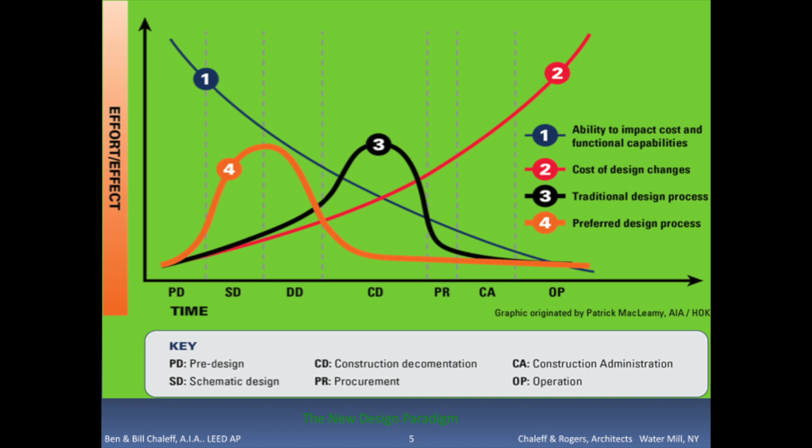So here we see, for example, just in site analysis, we're looking at all the different drivers, the different forces that impact a decision about what to do on a particular site. This is just a quick sample. Down here we can see we're looking at the sun and its path through the sky at different seasons and different times of day—very important for us to understand when we're doing a building.

Here we're looking at what exists in our area—what are the resources, what are the features, the size of the site, the contours, the topography, that impacts drainage. That's what's being shown here, from rain, which could cause erosion, which we looked at in the previous lecture, and views.

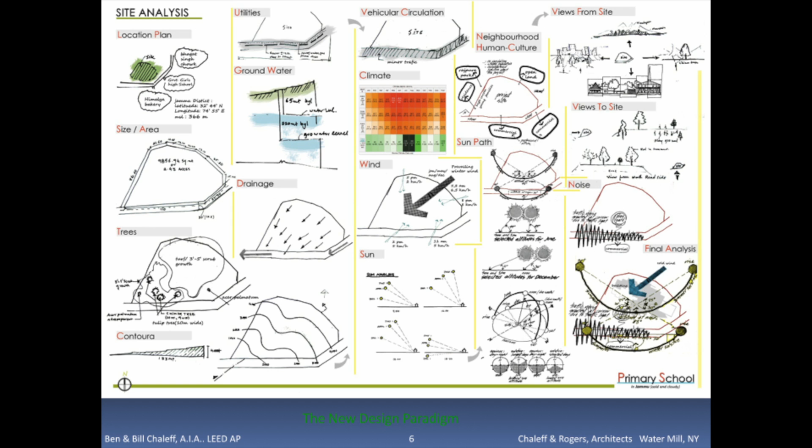Then there are cultural decisions to be made about the project. So you want to bring everybody in on the front end and look at all these different aspects and get them laid out on the table, because somebody whom you think is just a plumber may have experience and bearing on the work of, say, the electrician or the duct person, or may even come up with a wonderful idea about the program that has nothing to do with the mechanical systems of the building—but he just happened to have been to China or something and saw something with bearing on the project, and he can convey it. We don't want to pigeonhole people.

So again, site analysis—do you want to say anything at this point, or continue along here? This is just a different way of diagramming some of the same things that were shown: wind and climate and sun orientation. There are some symbols you can see over there—prevailing winds, existing vegetation. Use your pointer.

It's just a different way of diagramming, but it's the way that we typically go about analyzing a site and integrating what the design possibilities might be from the beginning, taking into account everything—both the natural features and the built environment around it.

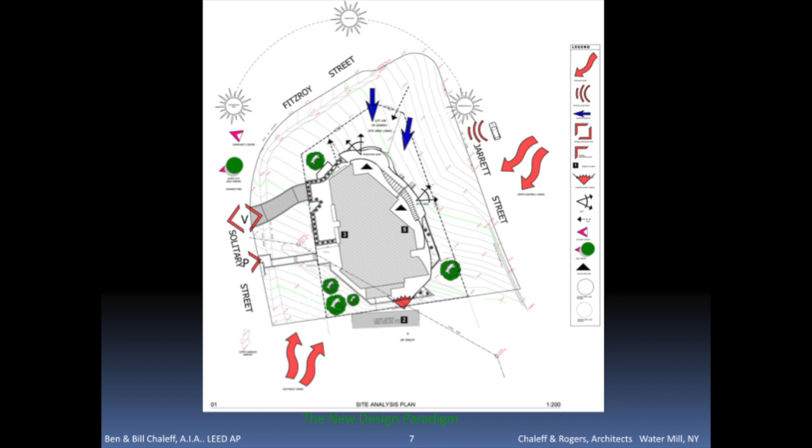This is something I'm always saying in the office: user patterns trump engineering. We get very excited about designing and calculating things now—modeling and calculating—and we have tools and equipment, some of it very expensive and magical in what it can do, going out three decimal places and so forth.

But with the best modeling and the best calculations, and your best imaginative projections about how the building may be used, that all gets blown to hell when the users come into the building and do something entirely different than you anticipated. And then the building is seen as not working—the building is failing.

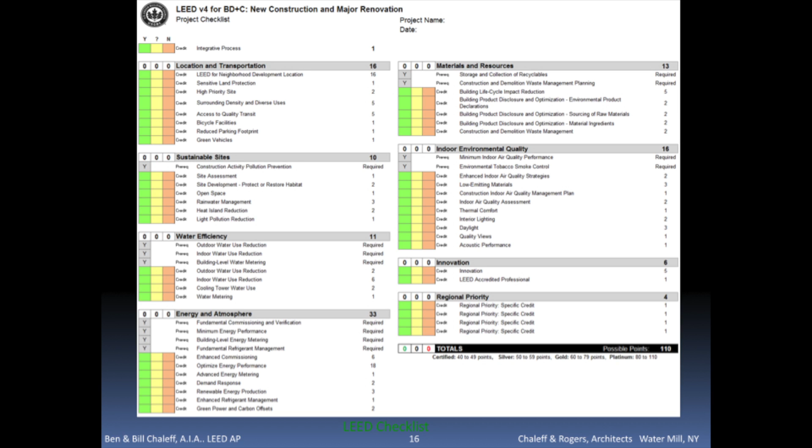And the main difference between the two is certification for each step. With LEED, they do an independent third-party certification of every little point. So you have to get somebody else in, and sometimes this costs money too and takes time. Some other expert comes in and sees that you've done this the way they expect to see it done, and therefore they issue a letter with their signature saying that this point complies with the rating system. And that happens through the whole checklist if you're LEED.

You can self-certify to a large degree with the National Home Builders list. But I don't think the tax incentives and other incentives that you might get from LEED are as substantial, and that's why it requires third-party verification.

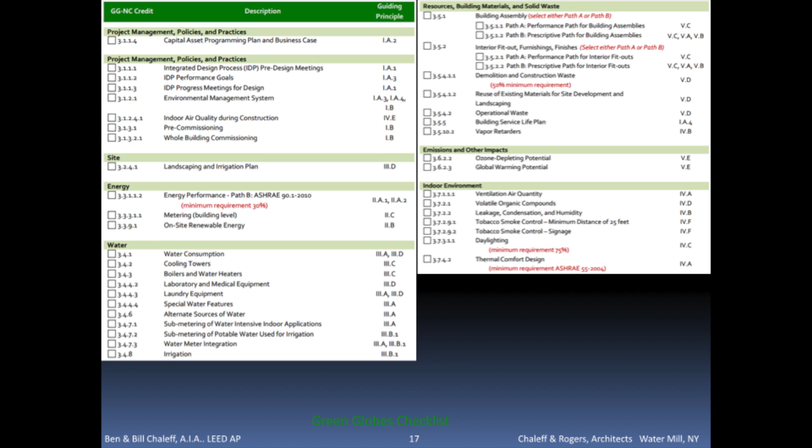Not necessarily. Particularly from government, because they don't want to be accused of a monopoly. These are considered professional engineering compliant standards, whether they're certified or not, and you're eligible for whatever programs the governments have that involve money under any one of these banners.

So they are taking the U value of all the windows and the walls and calculating what the building should perform as a number, as a metric. And then they're also integrating this whole checklist at the same time, which talks about - actually, I guess this happens during the walkthrough.

This is not so much - and before, when you file the plans. But some of this actually has to be observed, not just that it's on the plans, but that it was actually built that way.

So they're checking that all the sealing was done, for example, where the frame wall meets the foundation wall, that's all caulked, and that all the air infiltration is minimized. They're looking that the ductwork is all sealed properly internally, as well as if it's in an unconditioned space, which is not a good thing.

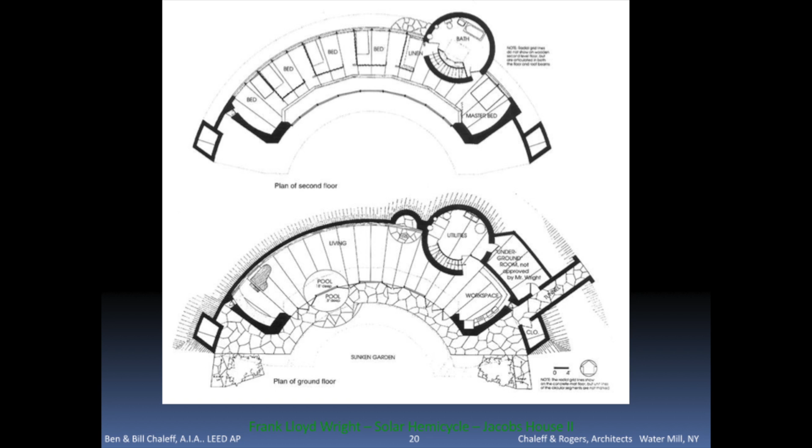A really amazing building, and a lot of work was done by Frank Lloyd Wright at this time, and by the Keck brothers, also in the upper Midwest. The overhangs are designed to shield the summer sun, which is at a high angle, and allow the winter sun to come fully in. Even this balcony on the second floor is cut back to allow for that and for air circulation. This second floor, incidentally, is suspended from the roof with steel rods every so often. It's a great building, and was done for very, very little money.

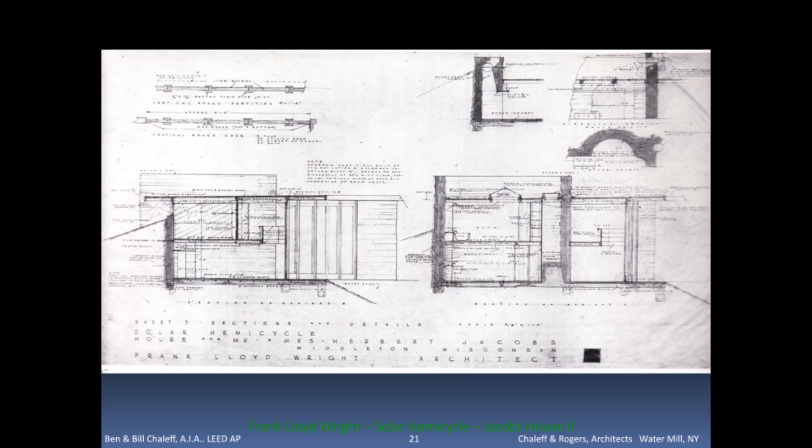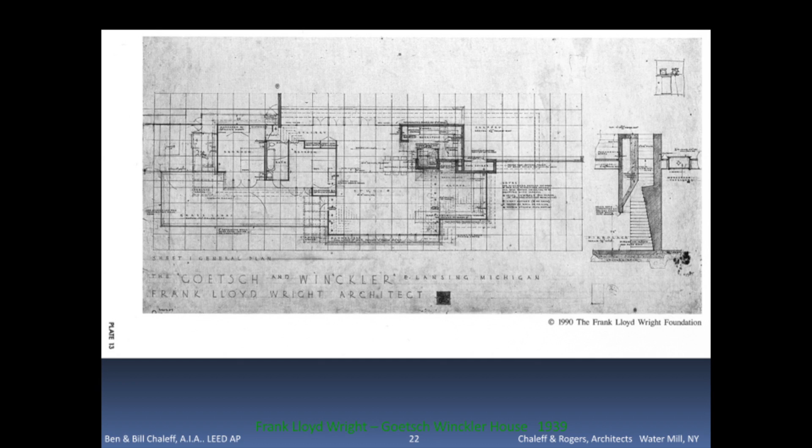Radiant floor. Frank Lloyd Wright brought us the hydronic radiant floor. In traditional folklore, particularly in Korea, China, and Japan, there were air floors where flue gases from fires were led under the floor, and the Romans used that as well to heat their buildings. But Wright put that in piping, and there was a big renaissance of radiant floors—certainly right after World War II, Levittown used radiant floors here on Long Island. Just another Usonian house.

Frank Lloyd Wright, with this line of building, the Jacobs House was the first one, but developed a series of buildings that used very much the same detailing and technology and materials, just concrete and wood frame. He organized the plans in such a way that these were the first true middle-class buildings, not like the Victorian buildings that we know and love and we see.

There's some right on Main Street right here in Bridgehampton. They were designed to be operated by staff - there was a butler's pantry, maids' quarters in the attic and so forth. Here, this is operated by the user. So the kitchen is open to the dining room, the whole space flows. This is the living room and the dining area, and then down a little corridor, in this case only two bedrooms.

He also invented the carport, and there's a dramatic photo showing that the overhang of the cantilever of the carport is just really fantastic.

Occasionally brick pylons - he would sometimes switch off stone for the brick. But these buildings were simple and inexpensive. The first Jacobs house was done for $5,000 back in 1936. The journalist's house - this is the interior of this Goetsch-Winckler house.

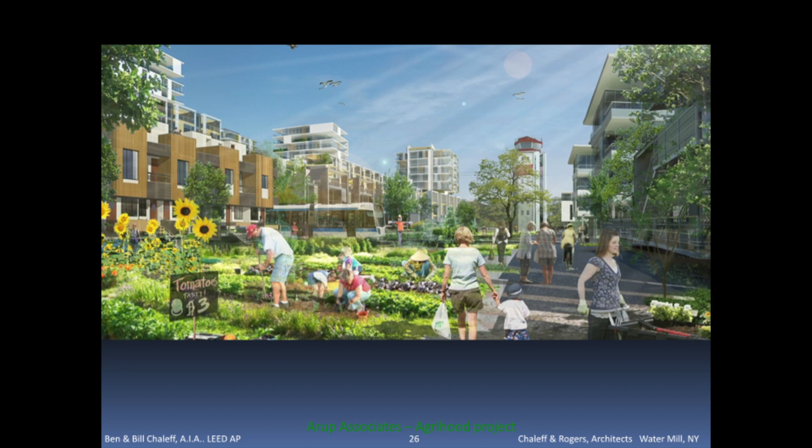But they were interested in the beginning too in environmental design, and actually had architects in-house and provided integrated design with full architectural and engineering services, including all the mechanicals and electronics and plumbing and so forth. And that's what they're really known for. They're headquartered in London, but they have offices in New York and in cities all around the world. They do amazing buildings, which you will see. You can jump in any time.

This is just, I think, a decorative greenhouse at the Bacardi Bombay distillery. And this is the Mushroom Tower.

Take a good look at it, and then the next slide has some text that's descriptive of what it's made out of and how it works, all right? So I won't read it to you, I assume you can read it.

So they're working very hard to close the loops here, and their carbon footprint is zero.

When was that built? I don't know, I'm sorry I don't know. What's the reason for it? Well, this was an experimental structure - this is the Mushroom Tower, but it's just showing the feasibility of the material. It's a test to build, so I don't know when this was built, but if it looks like it might have some years on it, I would guess it's at least 10 years old. And the question is, what condition are these bricks in today after 10 years standing outside?

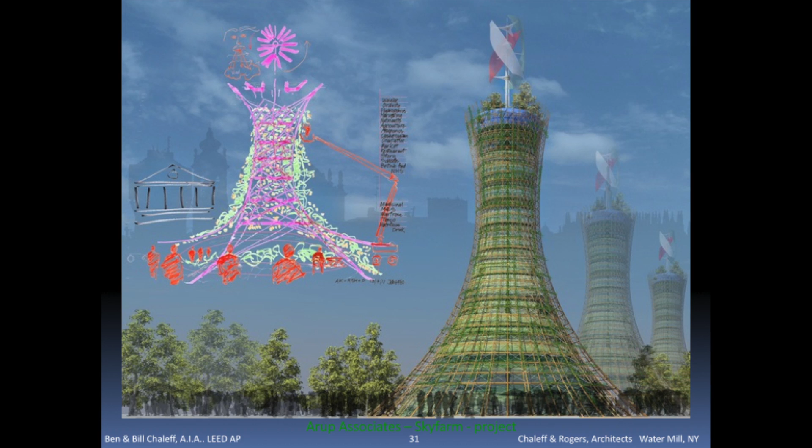That building is lit by sun energy still used for grow lights? Not for this, this is not a grow light building. I'm talking about buildings that are totally indoors, used with shelves and racks of trays of plant medium.

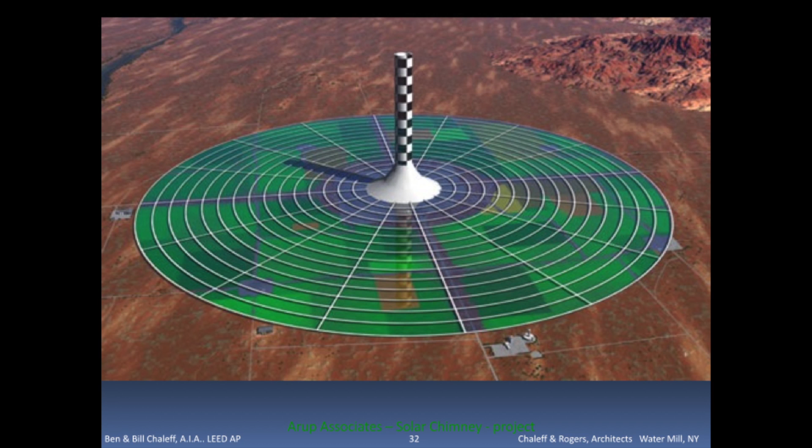It's used almost like a library, you walk down corridors and there are racks of plants. If you go to Page Restaurant in Sag Harbor, they have a vertical wall in back growing greens for your salad right there, plus a couple grow lights and trays in their basement growing other greens for your table. So this is happening right in our own neighborhood.

This is an extraordinary building, a solar chimney. It's a project, a design, unbuilt, just a project. I believe they did build a small sector of this in North Africa. It's designed to be built in desert country where not much else is happening. It's huge, I don't know the diameter, maybe half a mile or so.

This blue line represents a greenhouse roof. That big disc around the central chimney is a greenhouse roof. Warm air from the desert is drawn in from the perimeter because of the stack effect, heated by the sun. As it heats, it goes out and up, creating a fantastic draft. This is the mega super chimney, and that draft is used to drive turbines. So it's a way of producing electricity without reflectors and other things we usually see, a different form of wind energy, combined with solar here.

The interesting part of this design is explained here: you're taking in solar energy through the glass, and greenhouses work because they're relatively translucent to light energy but relatively opaque to heat energy. That is, translucent to short wave forms of energy and opaque to long wave forms of energy. That's why we have glass doors, windows, and greenhouses - that's the principle it works on.

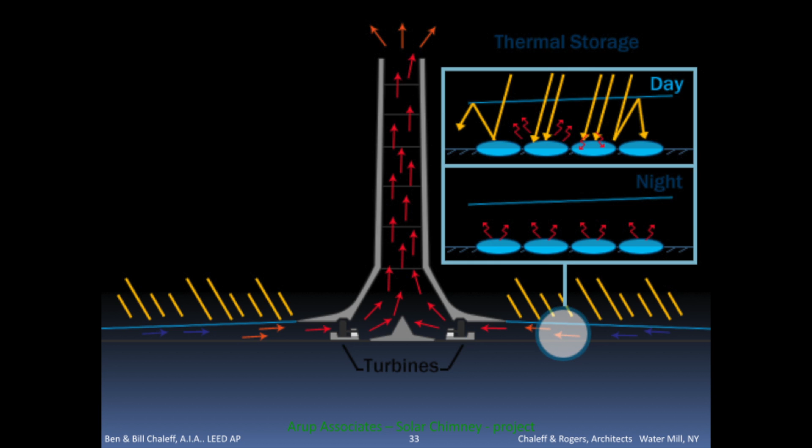There's a concern with restoring and regenerating nature, reintegrating the natural environment into the built environment. This is why Carol had us come speak with you here in the Natural History Museum - the new green buildings are literally green, we're sensitive. The design and engineering community responsible for them is very sensitive toward integrating the built landscape with the natural landscape.

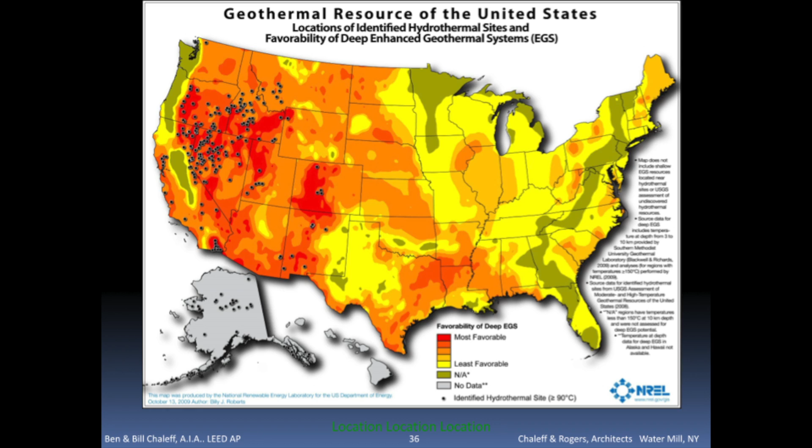And insolation. Long Island has the same amount of insolation as Nashville, Tennessee.

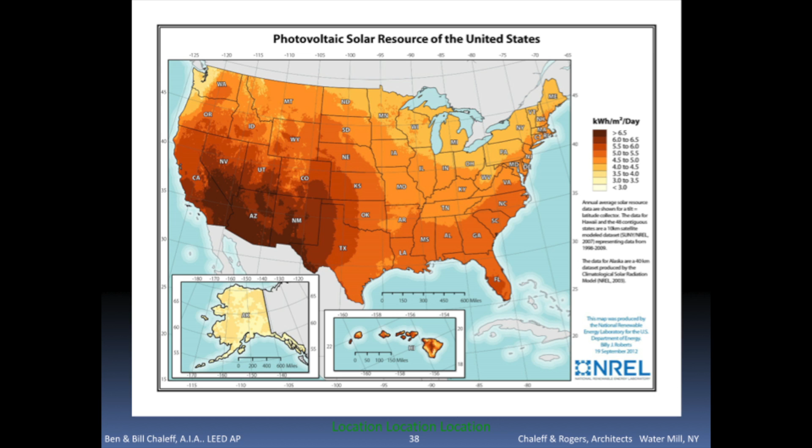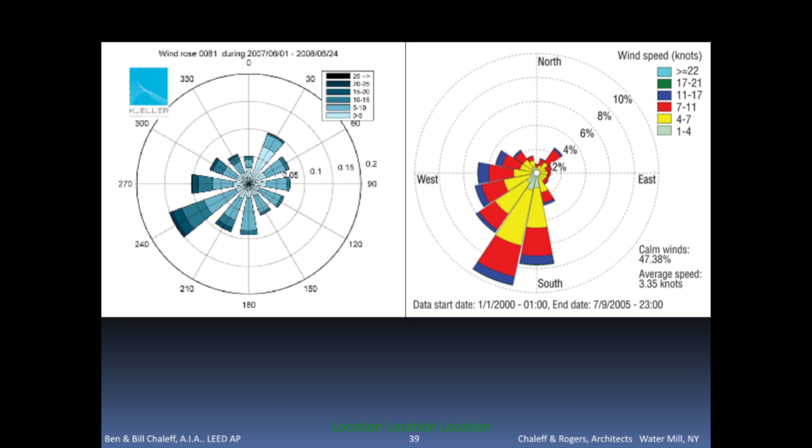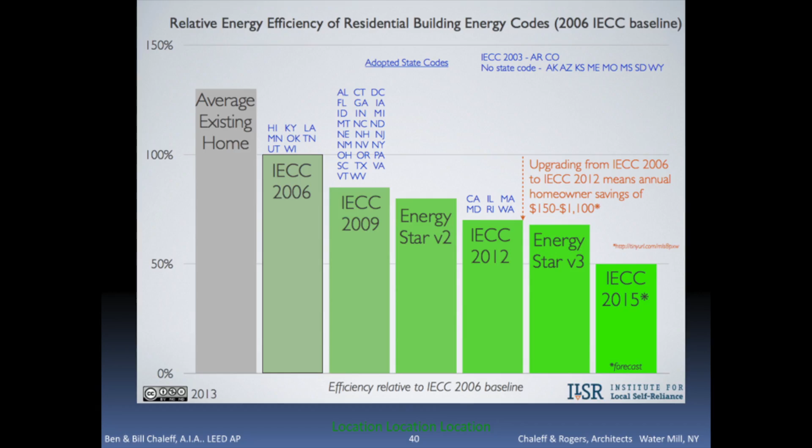No state and code don't mandate it. And there are parts of New York State where you don't need to comply with a code. The way it works is there is a code, in most cases a state code - the state writes it or adopts a code, and now we're getting together so that states adopt the international code. If your town does not adopt that code, then there is no building code where you live. But as far as I know, there's no place in New York State where you can build without getting a septic permit, and that's usually issued by a county government.

And this number is rapidly going down because of - anybody? Right, LEDs. We have a little story about that coming up in a minute.

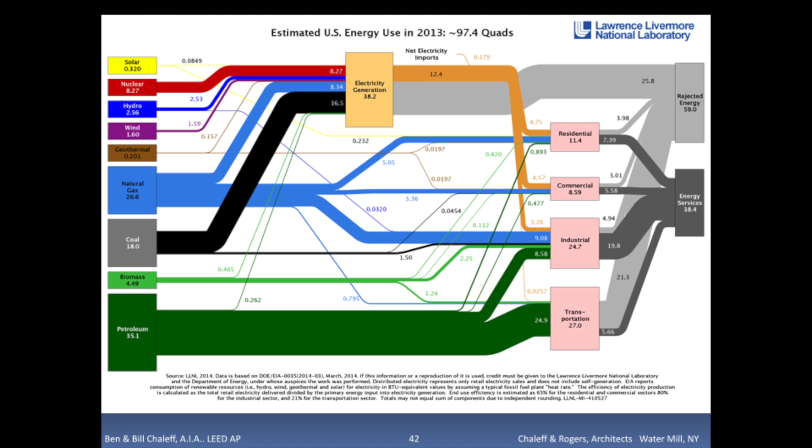And I'm going to put my friend Gordian on the spot and ask him to define a quad for us. Oh, okay, all right, wait, I think it's... we'll have to look it up. No, it's not - it's a lot of energy, a lot of zeros behind it. Just a lot of zeros behind it. Okay.

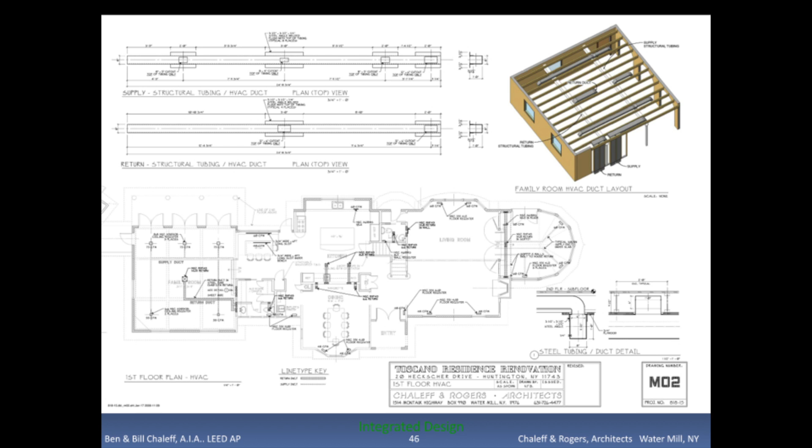So we put two beams at third points right here. And I don't know if you can see it clearly, but we echoed those with, pardon the word, fake beams here and here at third point. So we had a coffered ceiling of 9 panels, which would look very nice. This was on a slab, the garage.

So we had no way to get the ductwork up to that second floor bedroom. So we brought the ductwork up here in the wall between the garage and the building, and the ductwork became, these steel beams became, instead of wide flange beams, the I-beam that we all know, here's the beam. It's a steel tube. We sized the steel tube to be the right size for engineering the loads for the structure, and we sized it also to be the right size for the duct.

So one of these steel beams was the supply. It says supply structural tubing duct. That was here. And the other one was the return, and we had to put holes in them, and they connected. They picked up these little feeders and the registers. This shows the layout. And this was the duct system, and it was the structural system.

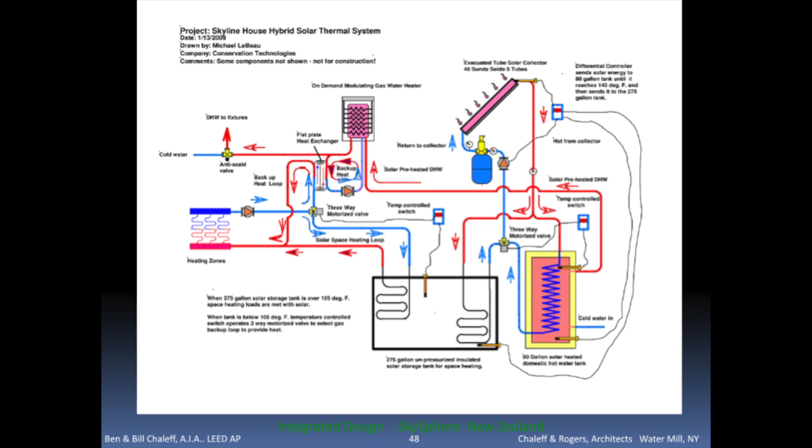And these fake beams, which were made out of cast foam, unless you got within 3 inches of them, they looked like old weathered barn beams, big old beams, but they're made out of foam, polyurethane foam. Instead of making them big solid chunks of foam, they hollowed them out. You're really buying a 3-sided piece of foam, a U-shaped foam.

We looked up the size of those, and it fit exactly around the steel beam. So that became the insulation for the duct as well. So on all those 3 levels, because we're doing this in-house, since we engineered and sized the ductwork, we engineered and sized the steel, we could do this integrated design.

Next. And then we picked up some eye candy for you. Let's see, just wind up with some of these. These are buildings around the world.

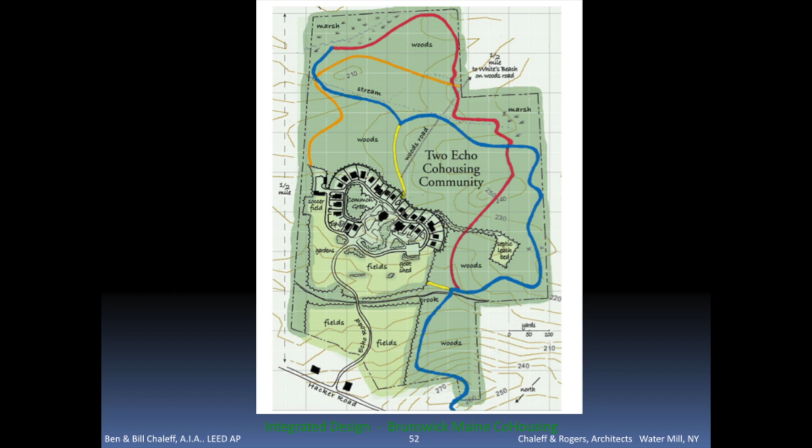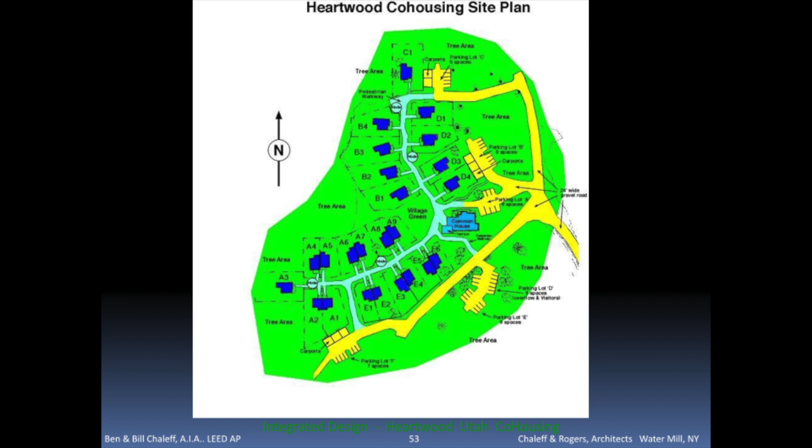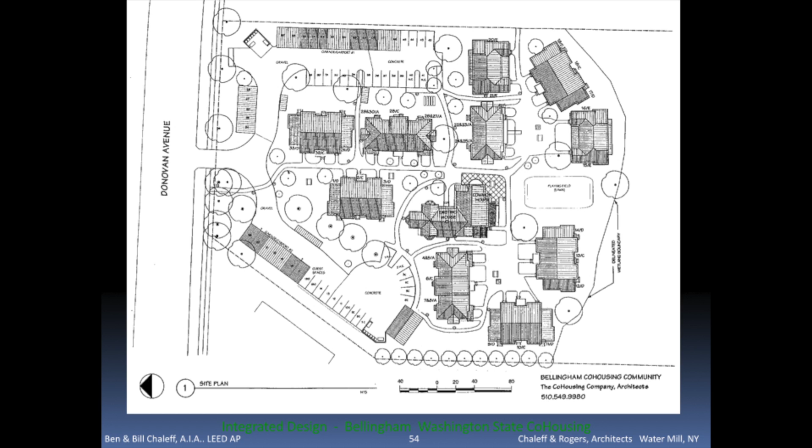This is much better. This is in Washington State, I imagine in a more urban setting, maybe on the outskirts of a village, where every square inch has to be accounted for. So it's very efficient. This was an existing house, and this lot may have belonged to that existing house, and then they added on a big common room, and this became a co-housing project.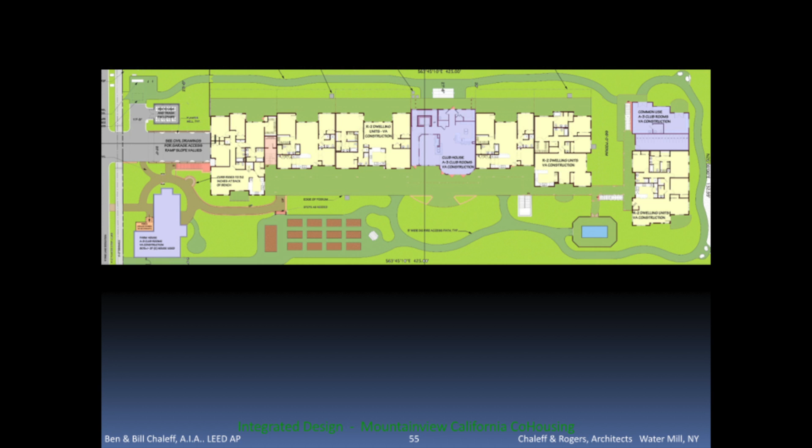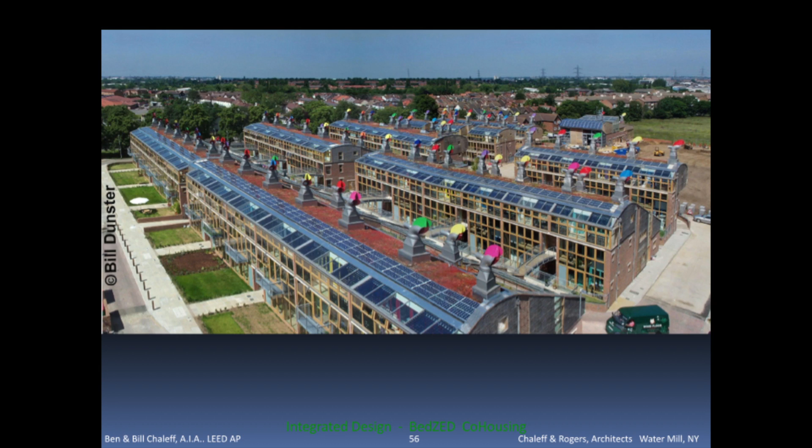Diagrams show how the different systems work. They also have wastewater reuse, gray water recycling, and classic passive solar design, with overhangs calculated for shielding the summer sun and admitting the winter sun.

Some of the stats: 81% reduction in energy use for heating, 45% reduction in electrical use, compared to local averages. 64% reduction in car mileage, 58% reduction in water use, 86% of residents buy organic food—I don't know about the other 14%, I guess people don't even talk to them, not sure how that works. In the community, residents know 20 neighbors by name on average. So again, a metric—how do you measure community? They picked this metric, how many names do you know of your neighbors? But there are different ways of measuring.

It's fueled by biofuel, combined heat and power. So this is essentially a diesel engine that runs on biofuel, not diesel gasoline, and the heat that all these combustion engines produce is used for either hot water heating or space heating. So there's PV, and of course rainwater collection.

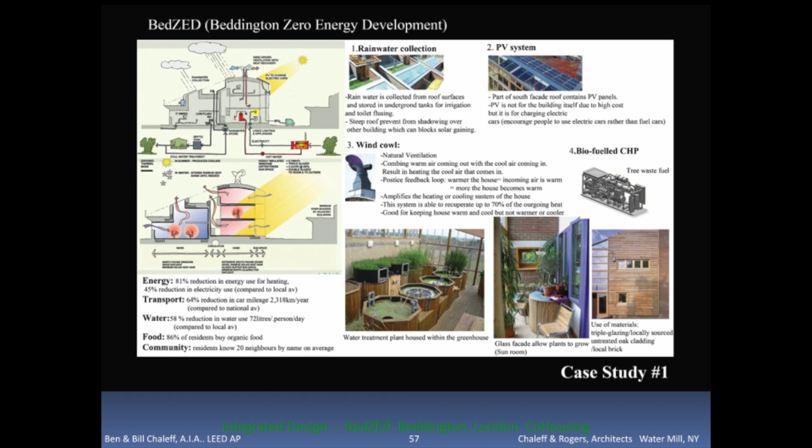A slide showing all those systems, and the end elevation—it's just a lot of fun. This is sort of like the banjo of the orchestra. You can't play sad music on a banjo. This housing, nobody is unhappy in here. I just can't picture how that would be.

Well, the 14% not buying. Oh, that's right. 14% are unhappy. Good question.

I'm trying to work on a co-housing project in Sag Harbor. I had Robbie Stein's ear, but Robbie Stein didn't make the cut, so we'll see. I'm going to make an appointment with the newly elected mayor of Sag Harbor to see what I can do.

We talked briefly about this at the end of the last session, Tyler. Everybody has some particular interest, whatever it is that gets you going. There's got to be a way to channel that to make any part of this happen. For Ben and myself, this is what we do and what we really enjoy, but if it's just organizing with people and getting the word out, some of you are really good communicators or involved with media, that's very helpful. We know that in this community, people do turn out to try and make things happen.